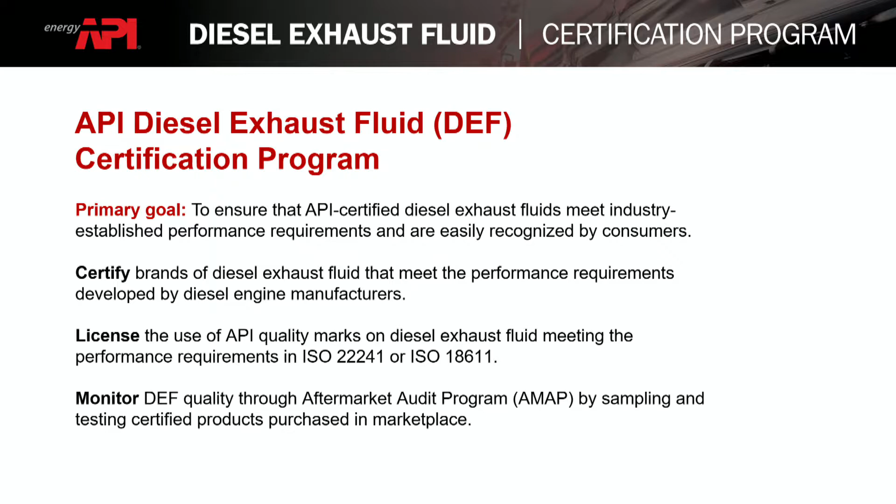As we said, our program is not based off of an API standard. It is based solely off of the ISO 22241 standard, which you can see on the cover sheet here. We also base our marine grade diesel exhaust fluid licensing program off the 18611. Both of these specifications, as was mentioned earlier by Fabricio yesterday I believe, are 5-part specifications.

For our program, we are most concerned with parts 1, 2, and 3. Part 1 deals with the quality requirements, or the specifications around the quality and purity of the product. Part 2 deals with the test methods on how to verify that quality. And part 3 is very important as well, dealing with the handling, transportation, and storage of DEF.

Just to give you an update, and I will speak about this a little bit later, these are living documents. ISO has recently republished, or published, a new version of Part 3 in 2017. They are in the process of publishing an updated Part 1 and Part 2, which is going through the DIS voting system right now, and publishing is probably not expected before Q1 and perhaps Q2 of next year, but there are some significant changes. So if you have been referring to the 2006 version of these documents, it's important for you to keep your ears on the rail to know when the new documents come out.

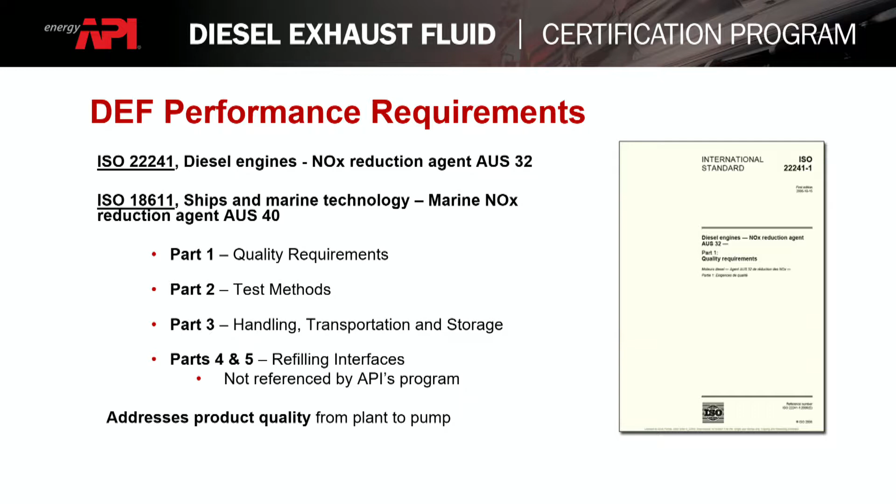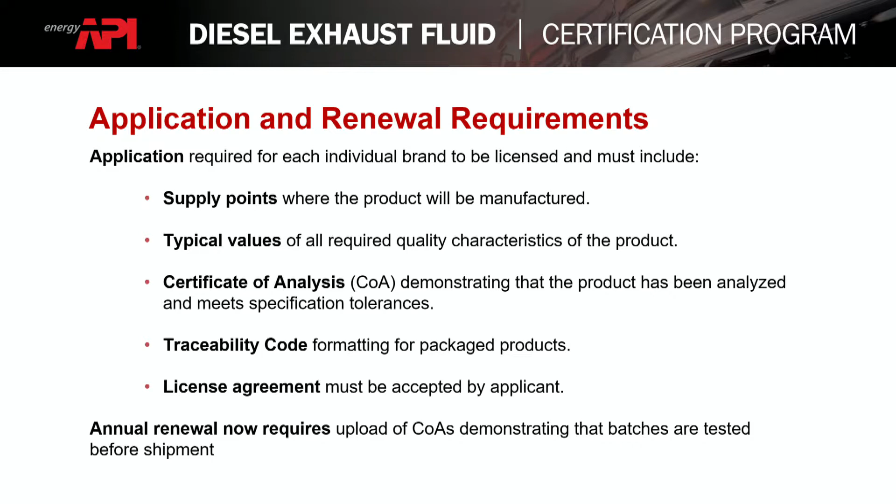The benefits of the API certification program: first and foremost, this program was developed by the industry stakeholders in the United States. They knew that API had an engine oil licensing program that had been many decades old at that period in time, and that we were doing aftermarket audit testing for engine oils and automotive lubricants. So they wanted, when DEF first came to the US, to make sure that the playing fields were level, in a very similar time frame that Mexico is in now with their time frame for development of

this industry. They wanted to ensure that there were ways that diesel exhaust fluid was going to be available to consumers and that it met the industry recognized standards. So our program ensures that. We also identify quality products for the consumers to go out and purchase, and as I mentioned before, we provide that real-time directory as the vehicle for which they can accomplish this.

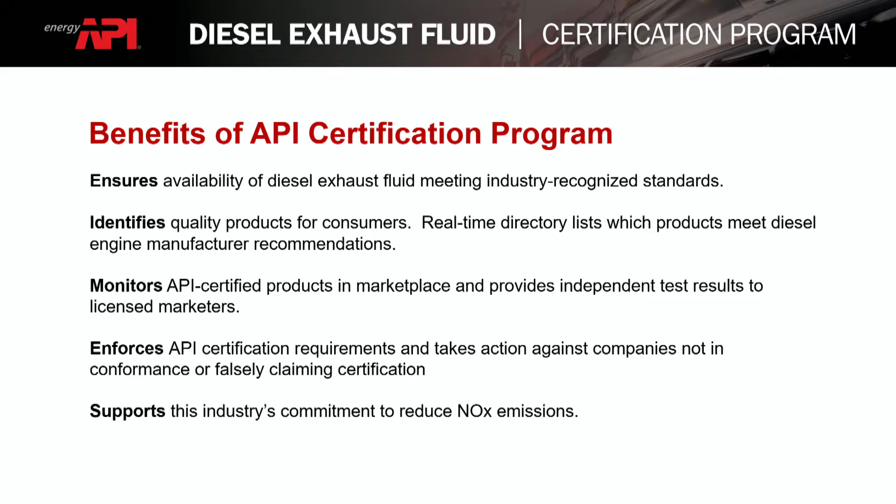We monitor API certified products in the marketplace and provide independent third-party test results to our licensed marketers. We do this to ensure that the integrity of the API trademarks is being maintained, but we also like to think that we're providing a service to the licensees to give you an outside perspective that you can share with your customers and your internal quality control folks to bolster your product and how it's perceived in the marketplace. And finally, we are in full support of this industry's commitment to reduce NOx emissions, and we're happy to do so.

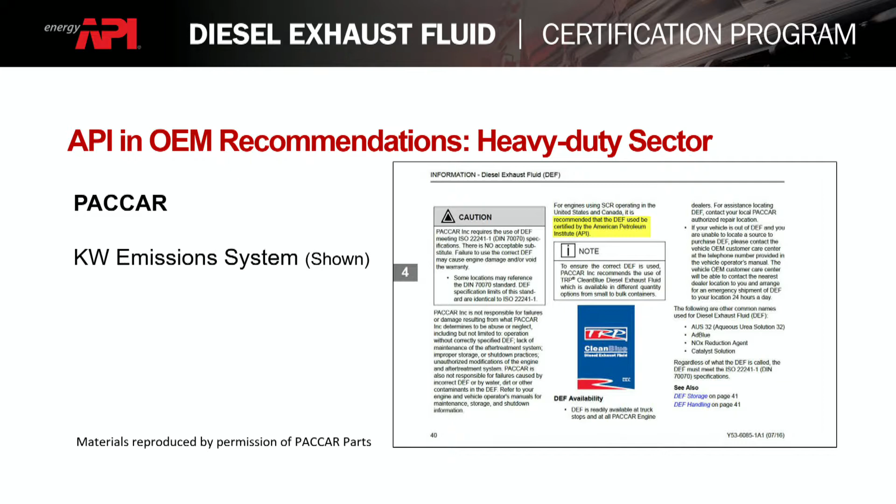Just to give you another vantage point as to benefits of the program, there are API references in OEM recommendations, and I've got a few examples here. I thank the OEMs that have given me permission to share this. What I show you here is from the heavy-duty sector. This is from the KW emissions system from PACCAR. Although it may be difficult to see, it is in yellow, the statement recommended that the DEF be certified by the American Petroleum Institute. This is an example for on-road heavy-duty trucking.

As we move over into the light-duty and commercial sector, here's a very good example of what API would love to see more in the industry. This is for Ford Motor Company 2017 model year, which I understand has continued into 2018 and will continue into the 2019 model year. For these F-250s, 350s, and so on, they're very specific: only use diesel exhaust fluid that has been certified by the American Petroleum Institute.

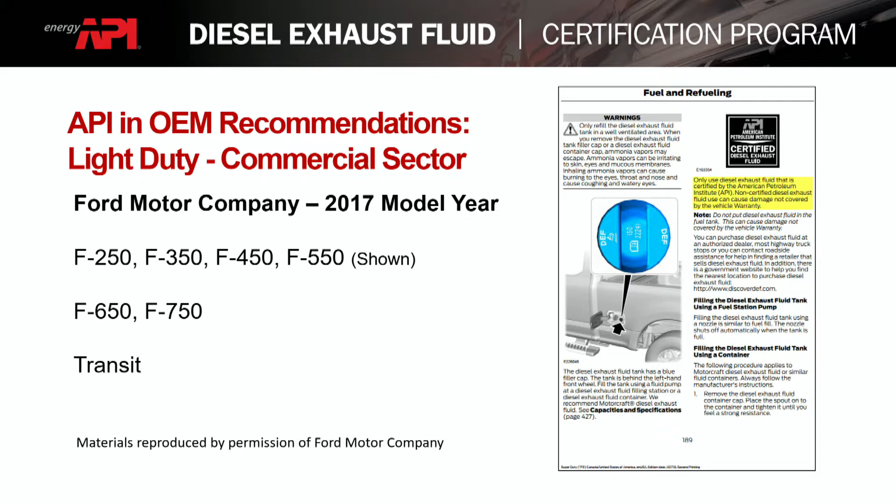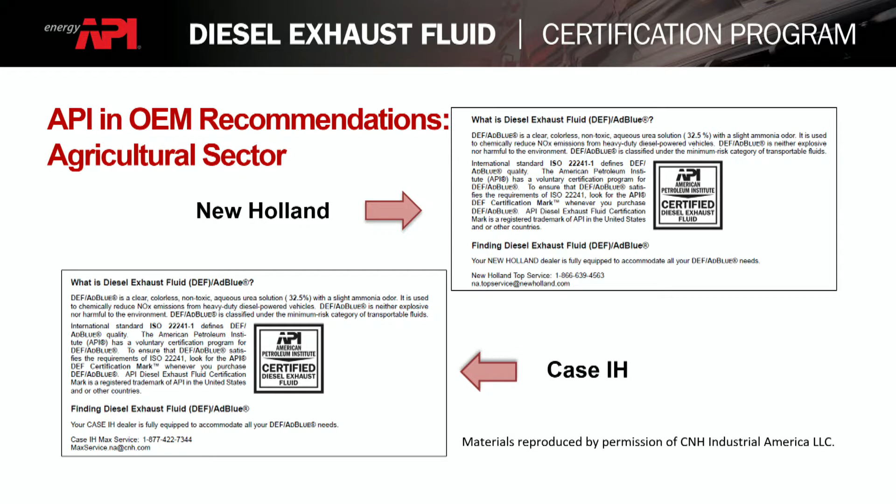As we have these discussions later on with this great panel, these are some of the avenues that can be explored, to work with the OEMs, whether it's API certification or a cooperation between the government and the industry here to have a different certification program, to convince the OEMs of the importance of making these sorts of specifications in their warranties. And because it's relevant in the U.S., I included it here. I'm sure we're quite a ways from this in Mexico, but here's the agricultural and commercial sector for Case IH and New Holland, similar requirements in their owner's manuals.

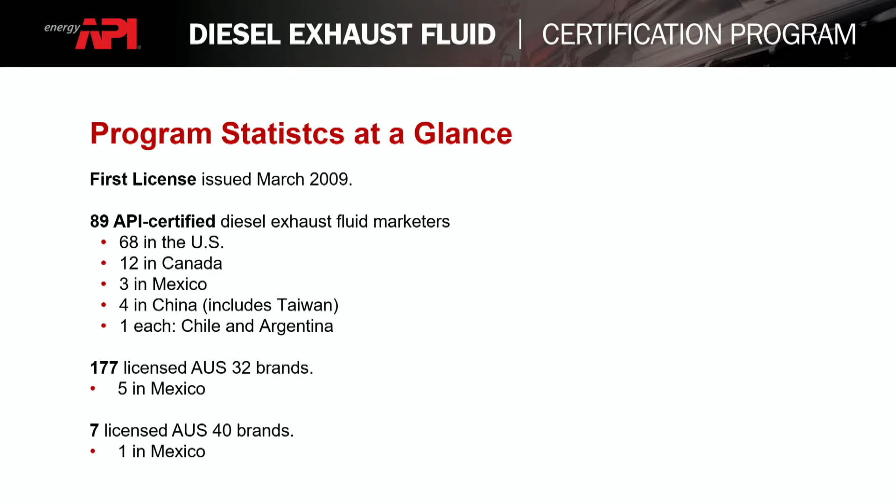So we do have licensees, but right now it's a growing program. Now to the audit program.

The primary goal for the audit program is to test as many API licensed products as possible from the broadest geographic areas as possible. We are sampling packaged and bulk from the marketplace annually. Our cycle basically begins and ends at March, and we never stop sampling. Every year we continue to add samples as well.

So our original goal is to sample these products from the same places that consumers are purchasing it. So we're heading to the truck stops and taking samples out in the field. We are going to the retail areas and purchasing the small packages that are still being sold in the United States and whatnot. So we are trying to take product at the end of the distribution cycle to ensure that the quality at the end is there.

However, we have heard the advice of the industry, and we have been and will continue to broaden our sampling at other points in the distribution cycle as well. So we'll be hitting up the blend plants and places like that. I'll describe that later.

At the time of our purchasing, it may be necessary for our collectors to review bulk shipment paperwork. It's very difficult to identify in America whose bulk product is in a tank, especially if the owner is buying whatever they can get for the most affordable price. This presents problems for us to identify the fluid. Number one, maybe these fluids are commingled. That's a big issue. Number two, maybe the personnel on site at the time that we arrive to take the sample is not aware of who the supplier is. And so we may ask to review bulk shipment paperwork in order to make those determinations.

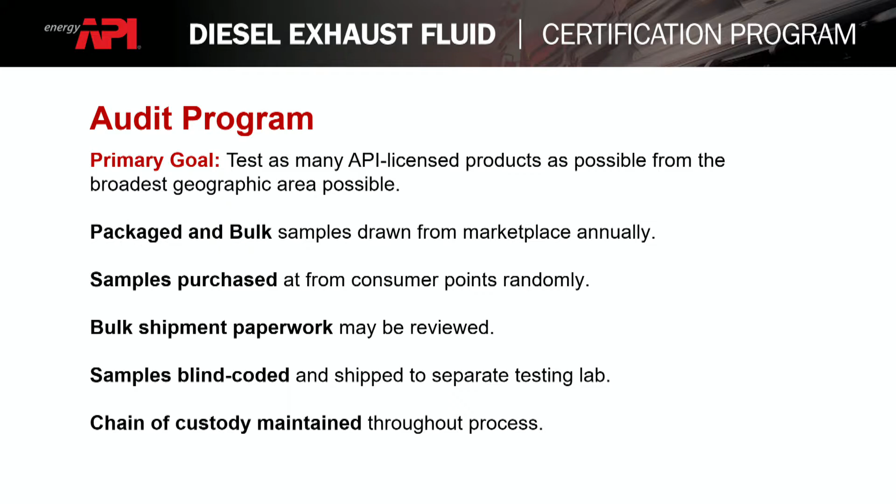Once we receive the samples, our collectors will send them to a primary central laboratory that we contract with, who will blind code those samples. In other words, they will put them into blind sample containers and send them to a different laboratory that we also contract with, so that that laboratory is not aware of whose fluid they are testing. And throughout this process, API maintains a strict chain of custody in case we need it in a courtroom someday. Hopefully that never happens. It hasn't happened yet.

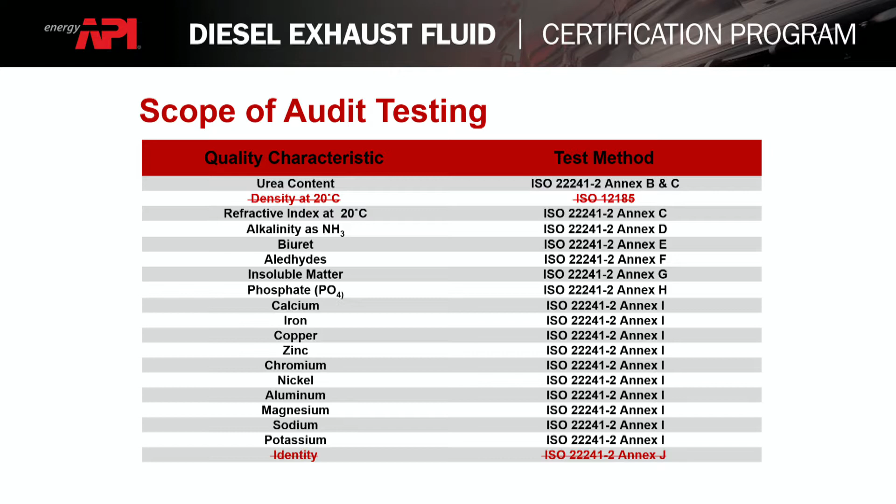The scope of our audit testing is shown here. These are all the tests from Part 1 of the specification. My only note here is that I've drawn a line through 2 of them in the upcoming version of the standard that will be published soon. The density at 20 degrees C and the identity tests have been agreed upon to be removed from the standard, and I do believe that will pass the vote. We've discontinued testing those even today. So there's an update for you there. There will be more about it soon.

Our audit evaluation method. Once we receive the data back from the laboratories, we evaluate that test data against the ISO specification limits from Part 1, but we expand the range of acceptability by reproducibility. If you're not a technical person, reproducibility is the ability for a single sample to be tested at separate laboratories, and it's the 95% confidence level of the agreement between those amounts. So because we're testing in a separate laboratory and retesting in another laboratory, we expand the limits of acceptability, and we will pass or fail your product based on that slightly expanded range. I will show that range on a future slide.

If we have any nonconformances, we will retest that at the same laboratory, retest it again if necessary, and then we also contract with a third laboratory to do a referee test so that we can be sure that the product is indeed failing for any one of the properties. Once all the test results come in, they are technically reviewed by yet another independent consultant who assesses the product for conformance to the specification.

At the same time, we examine any packaging of the product, whether it's tote or drum or 2.5-gallon jug, for conformance to some of the requirements around the trademark itself, size, where it's located, and how the company name is perceived on the label.

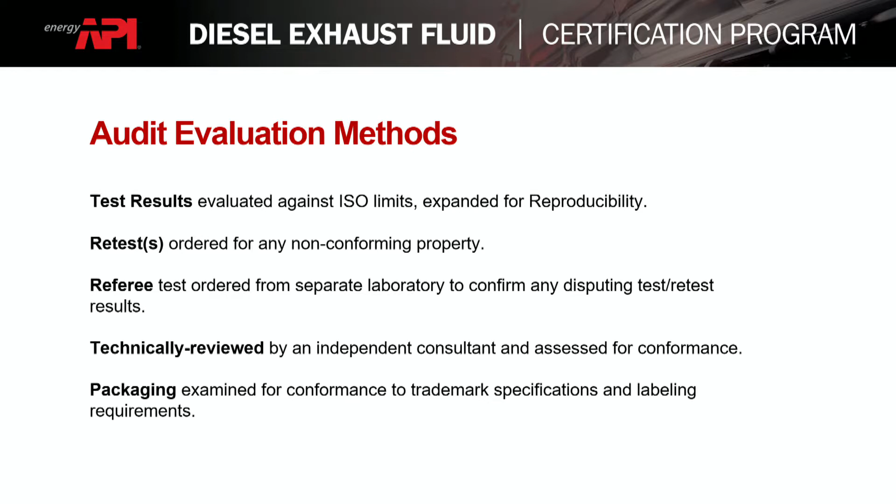Licensees are notified of the test results, passing and failing, through the online licensing system. So when an audit is marked as complete, you will be alerted, and if there's a need for you to respond, you will be alerted in a different manner, but alerted nonetheless. All nonconformances to the specification and to use of the mark must be addressed to the satisfaction of API.

In addition, API may be requested by the retailer where we purchase the sample to notify them of what the test results were, but we do not share the test results with anybody but the licensed marketer. However, we will share with them the nature of the sample, whether it passed or failed, upon their request. As I said, emphasis is placed on the confidentiality of the test results. It's why I will not be sharing test results with you here today. I only share test results with the company whose product we have sampled and tested.

Enforcement action is taken as needed. We will ask for corrective action and supporting documentation for any root cause analyses. If you cannot convince API that it's resolved to satisfaction in that manner, API reserves the right to cancel your product license, so remove the product from your license, or if necessary, remove your license completely and remove your company from the license directory.

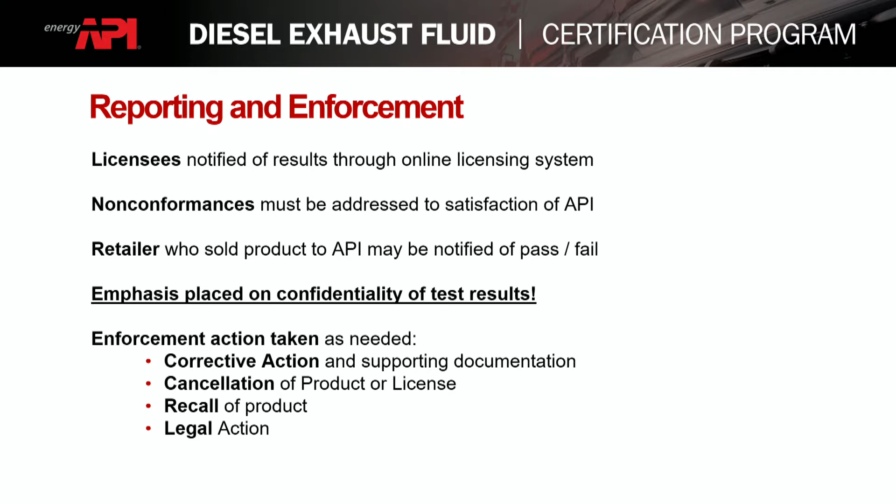Our API audits result in system improvements. You can see here there's a big list, and I'm not sure if we're over time. Should I speed up, or are we okay to continue? Okay. I'll run through just so the translation comes through.

On the manufacturing side, some raw material inputs have changed as a result of API audits. There's been new DI water systems installed. Defective sensors have been replaced. Filters have been added or replaced or maintained. And then fill and transfer lines have been dedicated to DEF only, whereas in the past they were used to distribute other fluids. On the quality control side of things, there have been many procedural improvements where rinsing procedures for reusable tanks and filling equipment have been adopted.

There have been increased test frequencies and increased independent laboratory tests of products. People have increased the frequency of their retains and the retention time of their retains. And then in some cases, there has been the addition of auto-sampling equipment to help with that previous bullet point. And obviously, re-education of employees responsible for the manufacture process. And to a limited, we hope more than limited degree, there's been a lot of customer education as a result of this, especially in the transportation, handling, and storage of the DEF.

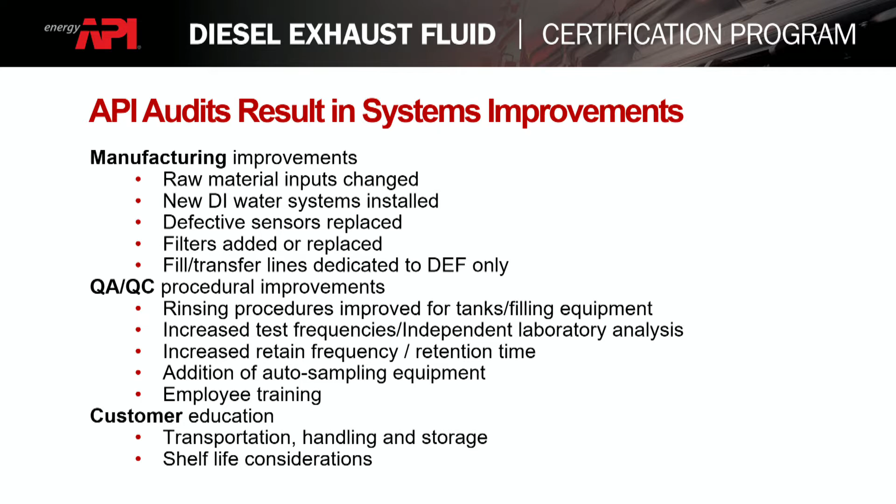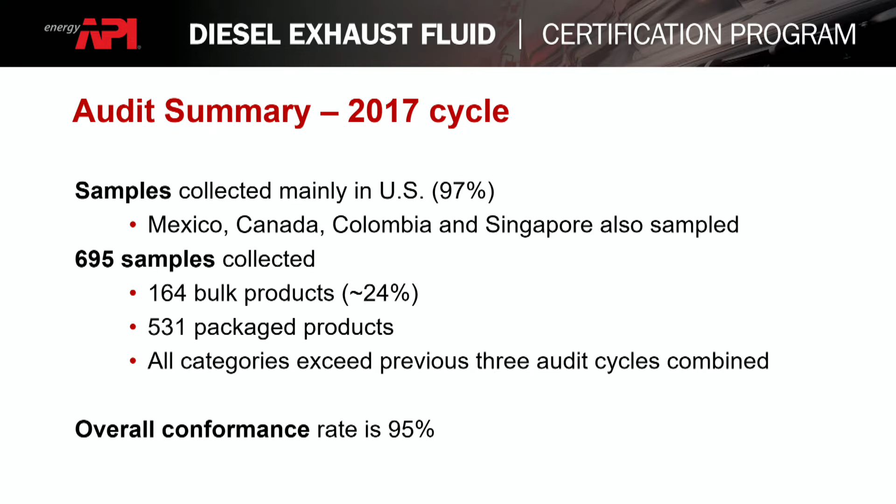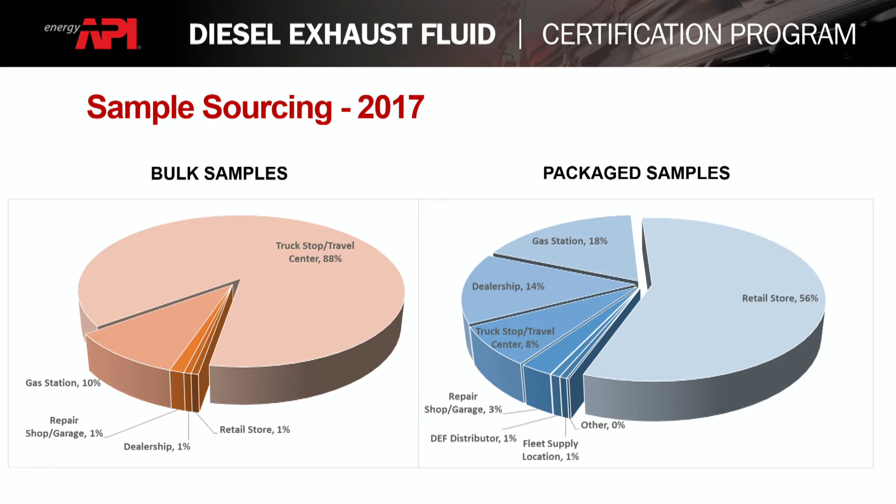Here's a brief breakdown, since I'm running out of time, I got a few more slides, of the types of places that we're sampling. For bulk samples, truck stops and travel centers are the big ones. On the package side, it's the retail stores, but my presentation is available for you later, so you can digest that perhaps later. Some of the trends that we are seeing: on the left side, we have bulk conformance, and believe it or not, that actually appears to be on the rise.

In the dark red is from 2014, in the light red is 2017. Oddly enough, the performance of packaged products did take a slight dip in 2015 and is on the rise once again. So interesting trend there.

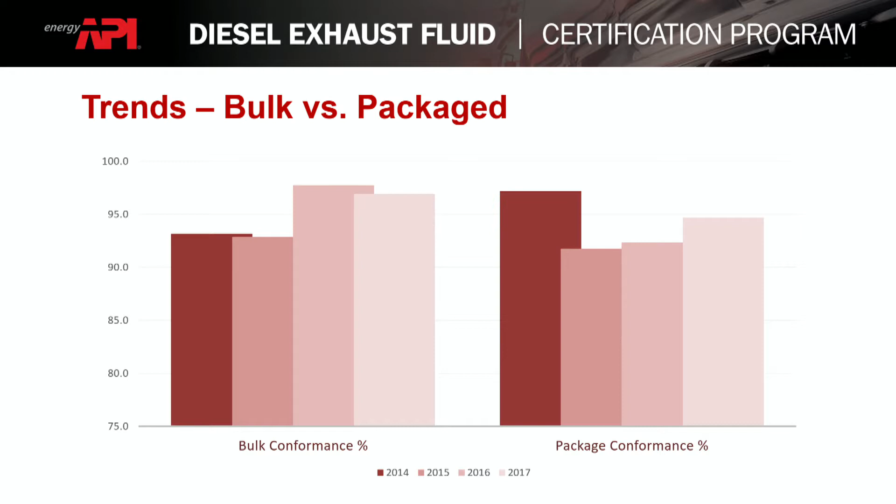Normally on engine oil we see higher degrees of failure in bulk than on packaged, but it seems to be a little different here for DEF. Remember, we're dealing with very close numbers there in terms of percentages.

These are the types of failures that we see. What I've done is added up all of the different properties that have failed for the past 3 cycles. As a note, a single sample can fail for more than 1, so these numbers do not represent the total samples that failed. But you can see right here in the red, top of the list, sodium and calcium are the 2 big offenders when it comes to failing properties.

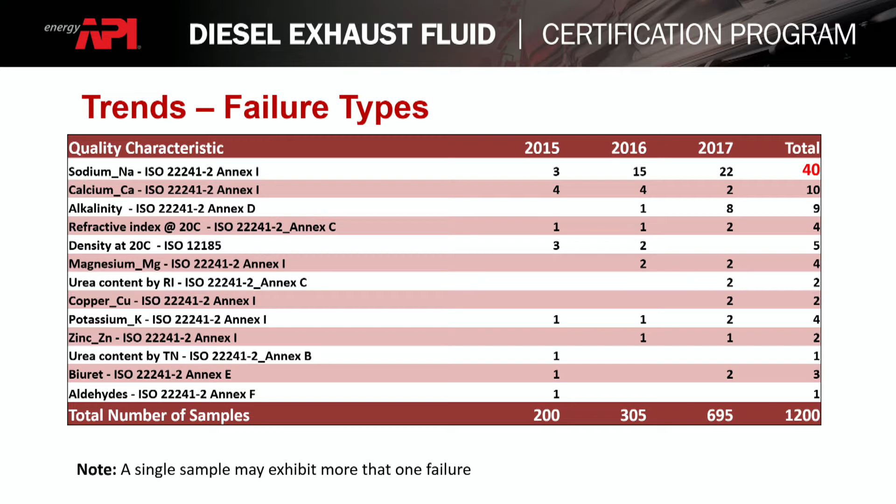This led me to take a look at some of the issues with water purity, and here I'll show you on the left the frequencies of water quality failures. Again, light color represents calcium, dark color represents sodium, magnesium in the middle, but you can see in 2016, 2017, the percentages of the total failures that were failures on sodium were up to 6% and 4%. So these numbers are climbing over the period of time.

So I went even deeper, and I took a look at not just whether a product passed or failed, but what the laboratory reported as a measurement. What I did was count the number of non-detect measurements as another way of visualizing how there is a climb. Certainly maybe there are products that pass the specification, but are we starting to see reports that don't have a minimum non-detect sort of report and did report some measurable amount of sodium, calcium, and magnesium?

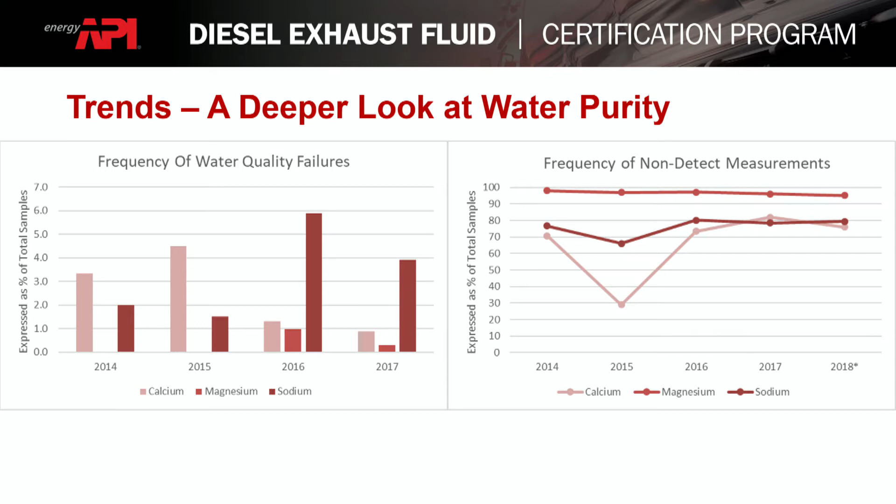Again, you can see here the big offender was sodium, calcium was the big offender. In 2015 we had a huge drop of measurements, which is maybe an anomaly - something we have to go back and check with our laboratory. But you can see the difference between magnesium and sodium and calcium there is almost 10 or 15%. So this, again, is another indicator that measurable amounts of sodium and other water quality properties are on the rise.

And this is a big deal because on the new standard, when it's published, they did some new repeatability and precision studies for some of the tests. They took a look at the old data from 2006 and reanalyzed it against the current ISO 4259 specification. I've got information there on the right-hand side.

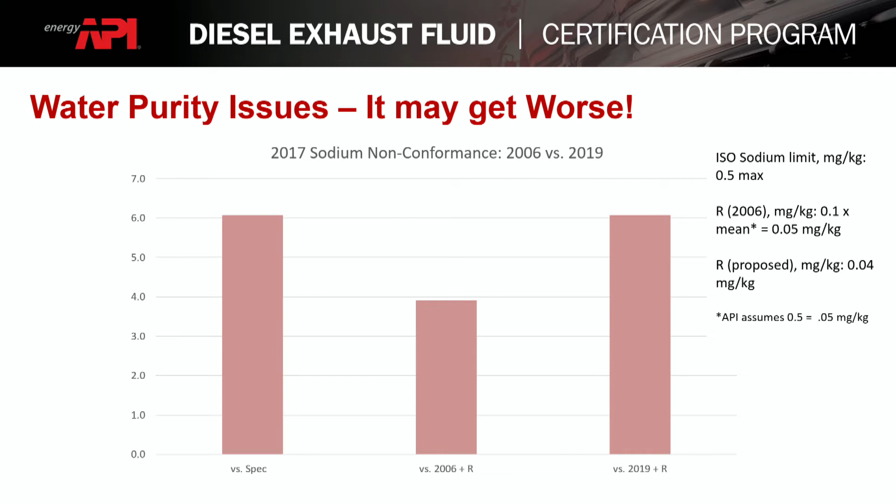These tolerances for acceptance, when you include reproducibility, are going to shrink basically down to the specification limits. So in the past, if your test laboratory was giving you results that said your product was passing because it might have exceeded ISO but didn't exceed reproducibility, in the future that's going to be a far less common case. Water purity issues are going to be on the rise very simply from the change in the specification. It's a problem that the industry needs to wrap its head around and figure out ways to prevent problems with water quality.

As I said about the specifications, this is a useful slide. Change is coming to reproducibility, and so it's coming to the way that we evaluate our samples. I provided the limits, specification limits here, along with the old 2006 plus reproducibility, and then what I'm calling the 2019 limits plus reproducibility. The important column here is that on the right-hand side, the effect on the new acceptance ranges is, in some cases believe it or not, going to increase, but in most cases is going to decrease.

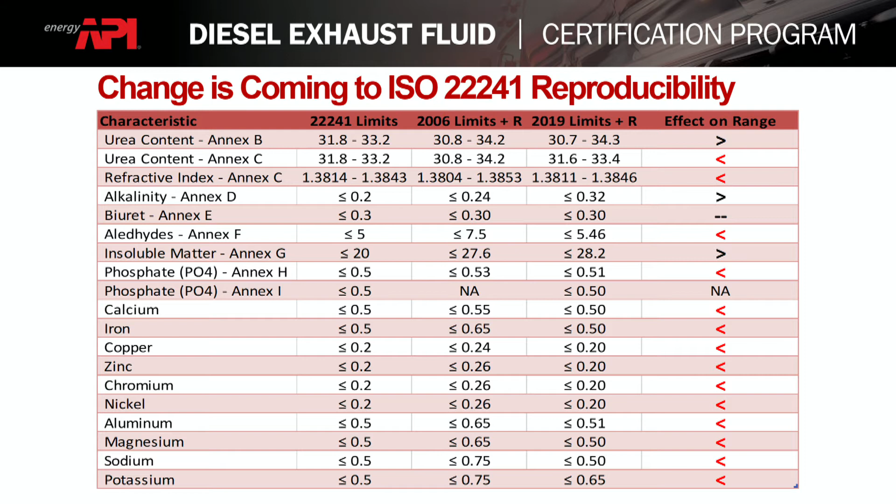We do, as I mentioned before, have cases of infringement that we have to take very seriously. So we do chase down illegal use of the certification marks and any false claims of API certification. We do this by issuing a list of demands, which includes label changes, destroying existing label stock, immediate product recall, and posting a public notice to all their consumers on their websites and other marketing materials to let them know that they were using the API trademarks without permission to do so.

And failure to meet these demands and resolve to API's satisfaction can result in the involvement of API's general counsel to ensure that the matter is brought to a close as quickly as possible.

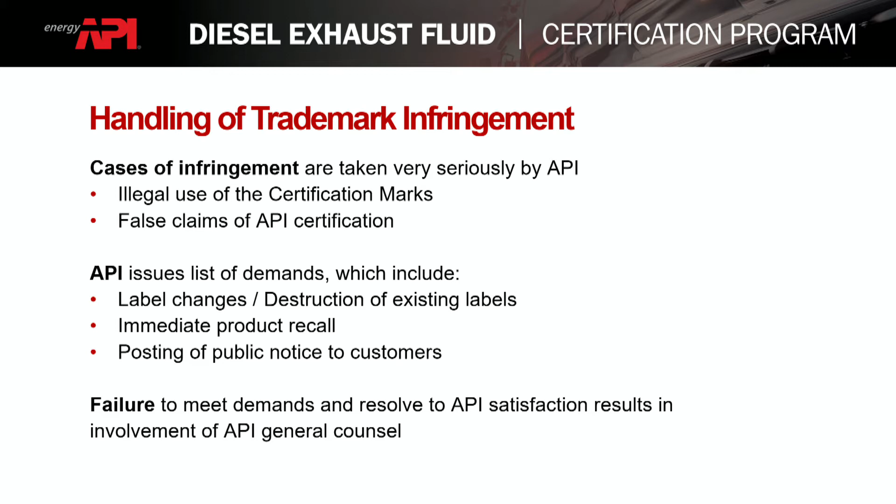Just a quick snapshot here. These are some examples of recent cases that we've had. I won't spend a lot of time on this, you can go through it later since I'm out of time.

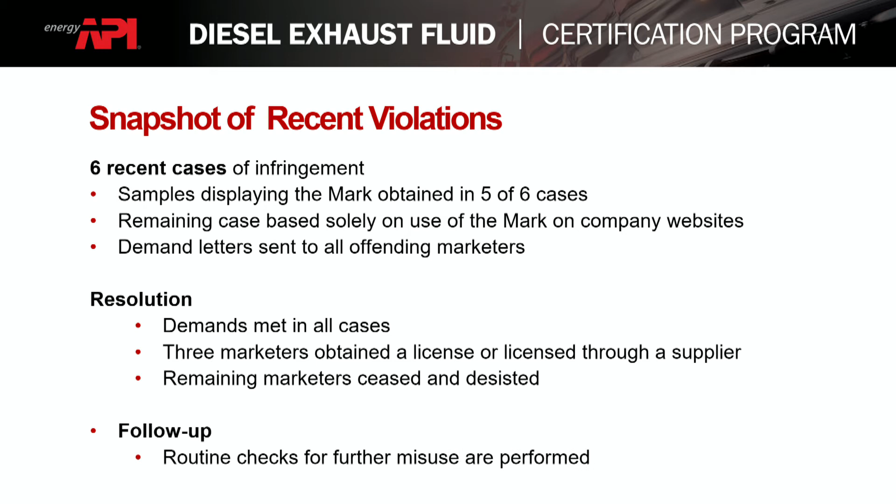For the future, we have audits underway already for 2018. This cycle began April 1st, and to date we've already collected over 500 samples. We have until March 31st to continue building upon that number.

We are going to be increasing our Mexico sampling, especially as the number of licensees increases in Mexico, so we can build new avenues for collection. This way we can find ways to obtain samples and get collection staff down here to start reviewing the quality of API licensed DEF available in Mexico as it becomes prevalent.

We will be adding plant sampling to our program. Our licensees will be asked, probably next week when I get back to the office, to disclose all of their blend plant locations and any source where their product is being manufactured.

That includes dissolution terminals, prill blending sites, or any site, even those used in emergencies whenever urea supply is disrupted. We'll ask for a listing of where their blend plants are and where they source their material. Then API will begin to strive to sample each of these blend plants randomly and routinely, if we're permitted to do so.

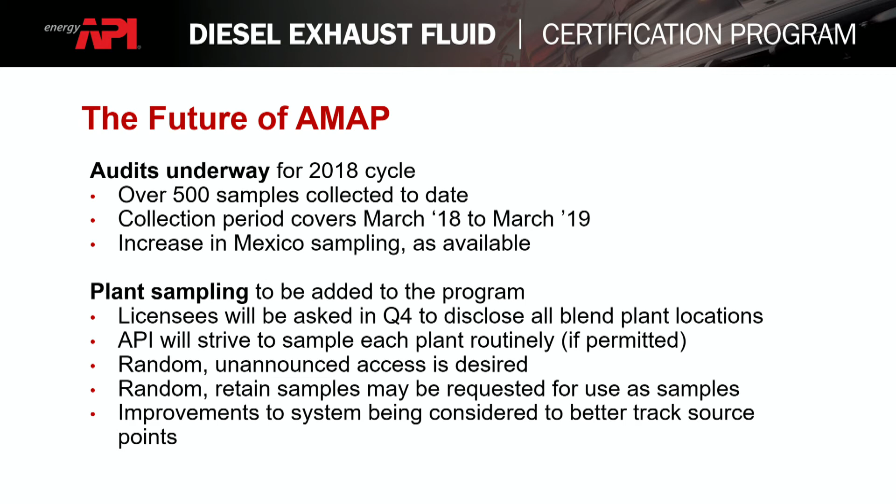We hope to key in on random, unannounced access. That's what we would like for obvious reasons, but that's not always an option. Finally, we may at random, when we show up, just ask to take possession of a retained sample if allowed. And we're going to add improvements to our system to better track these points.

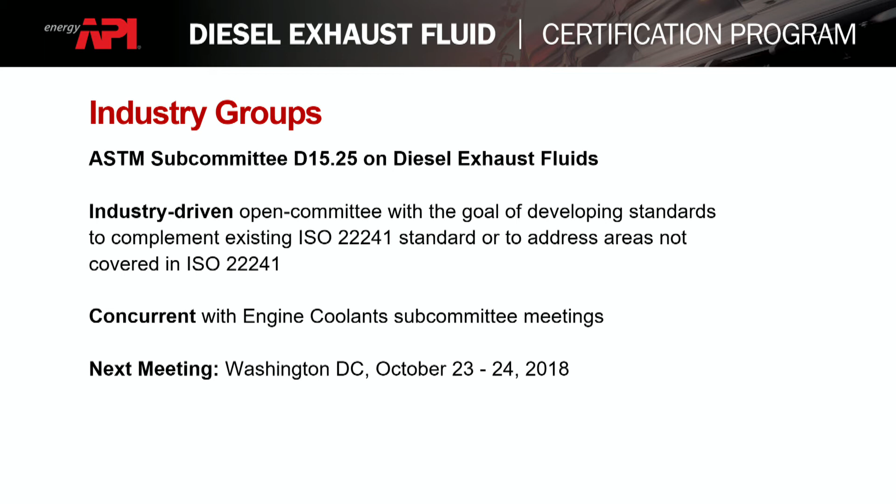As I mentioned several times, this is for your information. The ISO is updating—I won't go into this since I'm out of time, but you can talk to me about it afterward. This is another industry group making standards relating to DEF: ASTM D15.25. To date, they only have one standard, having to do with handheld refractometer determination. My slides need updating since the meetings were a couple weeks ago.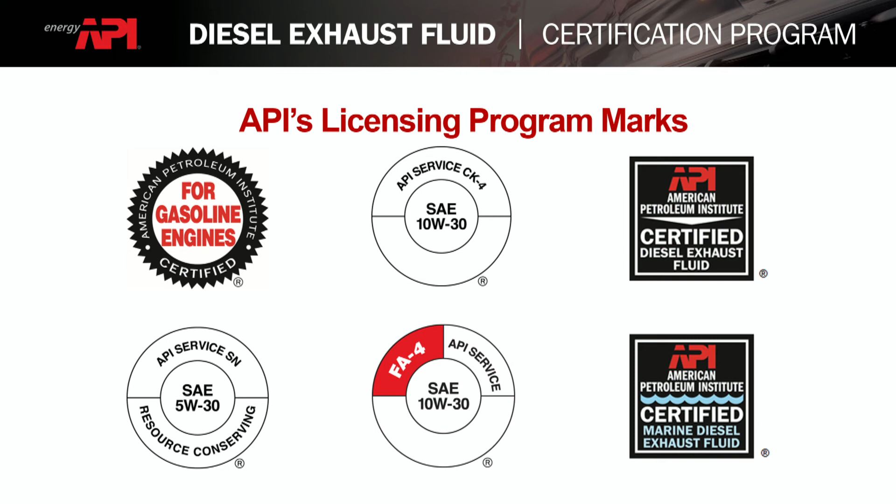With that, I'm sorry for going over. I hope Chad maybe has a short speech—who knows? If you have any questions, pull me aside. I'll be here for the rest of the day, and we'd love to give you a business card. I do believe we have a question over here.